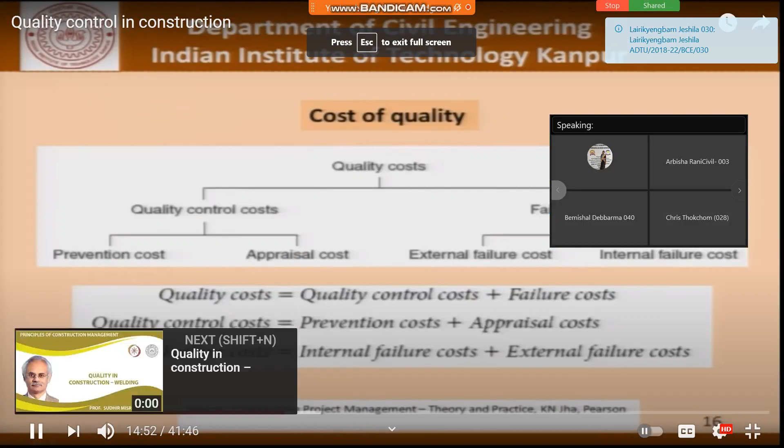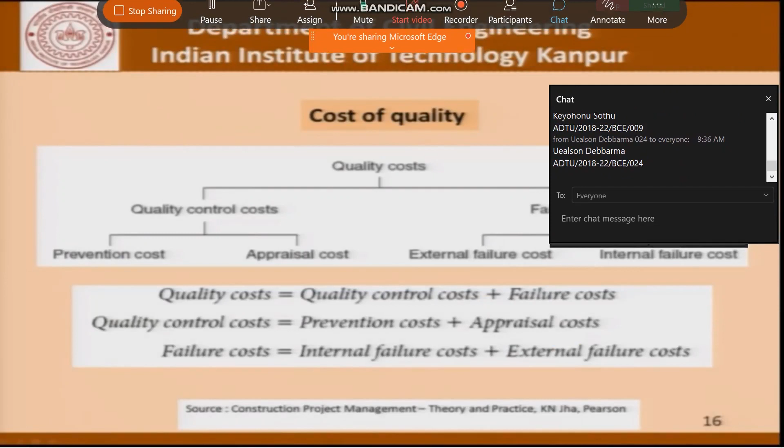Those failures could have an external cost and an internal cost. So the quality cost is equal to the cost of quality control plus the failure costs. The quality control cost is prevention cost plus appraisal cost, and the failure cost itself is internal failure and external failure costs.

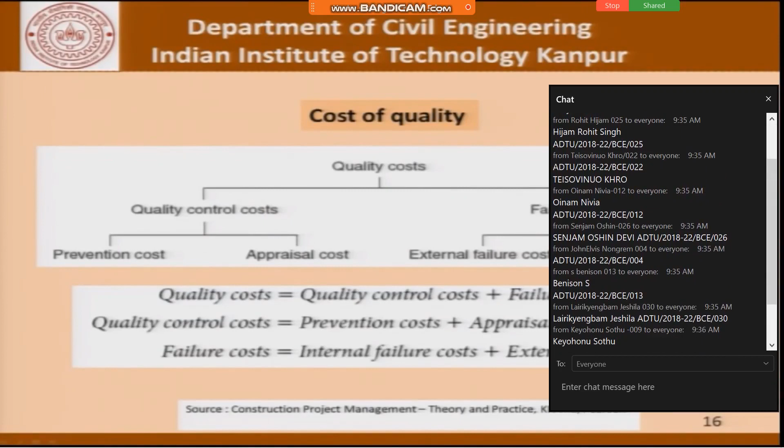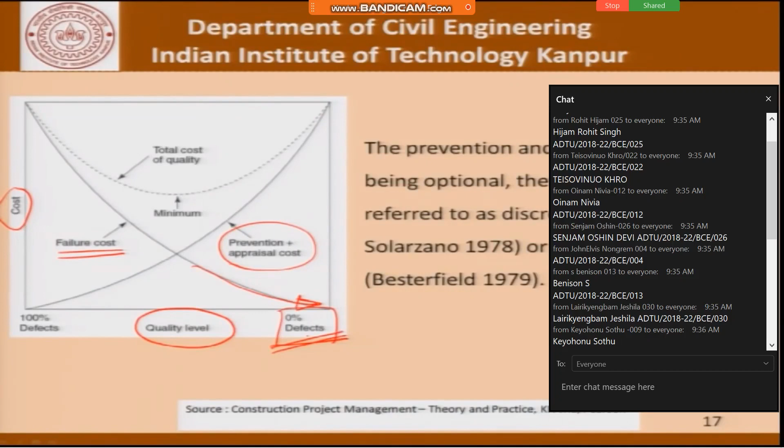Now it is up to us to decide what is the level of quality that we will keep, what is the level of quality that is acceptable to us, because there is a cost involved.

Now in the discussion so far, we've already talked about construction safety. Do you see some parallels between construction safety and construction quality? At least I see several things which are quite in common. When we talked of safety, we talked of prevention of accidents and the cost of safety.

Direct cost, indirect cost - accidents having a direct cost and an indirect cost. Then there was also the whole department of safety - a safety engineer, a safety audit team and so on. Those people were also involved in ensuring that the project site is a safe place to work, that is, there are few accidents. In fact, the target is zero accidents.

Now, in order to ensure that, there is a cost involved, and much like in the case of quality control, there will be quality inspectors, quality audits, quality reports, a feedback mechanism, and records have to be kept.

Both quality and safety inspectors are not mainline execution people. They can be looked upon as people who hinder the progress. So a quality control inspector can well say that the product being made or the construction activity being carried out does not meet quality standards, does not meet acceptable standards, and therefore must be stopped.

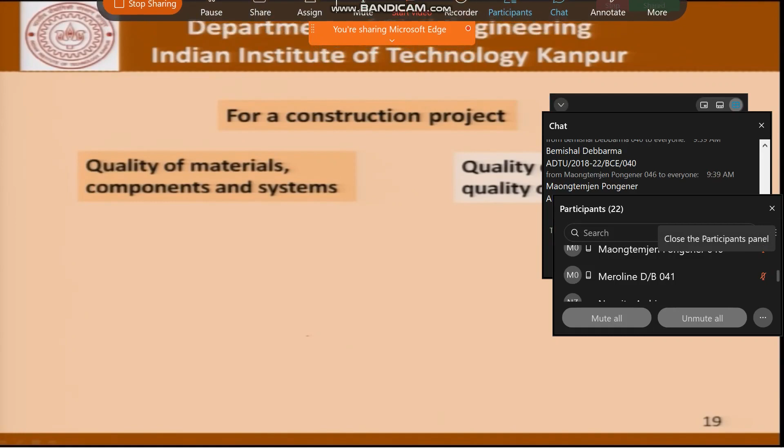Now as far as the first view is concerned, where we are talking about materials, components and systems - what are the materials that we use at site? It could be cement, steel, concrete, pre-stressing tendons, and the list goes on and on. Each of these materials must conform to certain quality standards, and that is what we are talking about when we say quality control of materials contributing to a construction project.

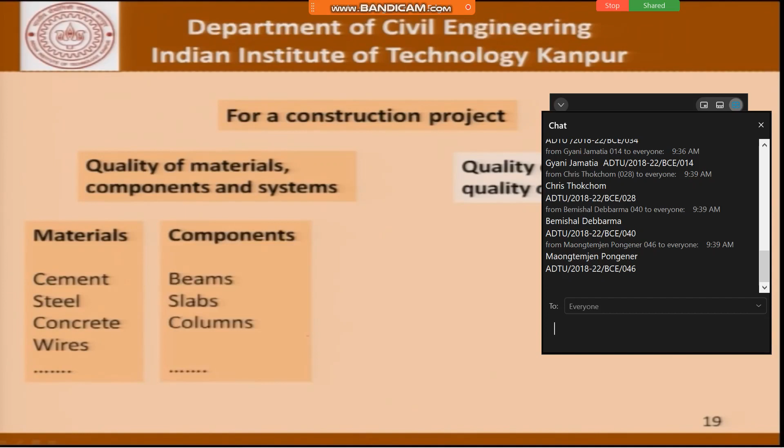Moving on, there are components of a structure. It could be beams, slabs, columns, walls.

All of them as components are made of materials, but there is also a lot of other things that goes into making them - the formwork, the compaction of concrete, the welding if it is involved, and so on.

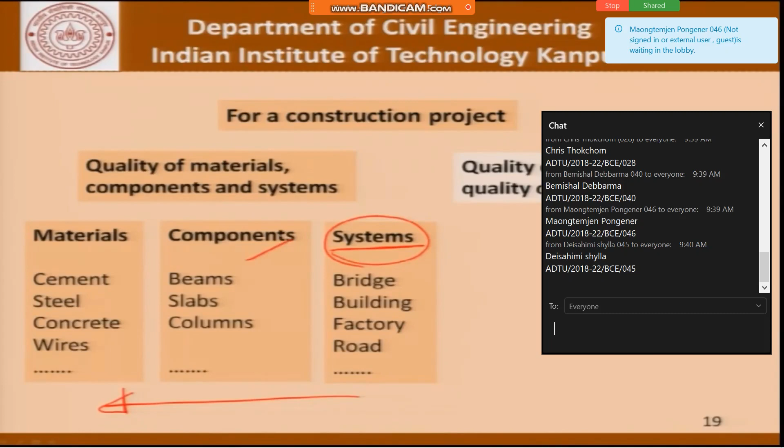Then there is the system. Finally, it is the system that is the target - the bridge, a building, a factory, a road, a sewer line, and so on. The system is the final product. In order to ensure that the system performs acceptably, it's important that the components perform satisfactorily, and it's important that the materials perform satisfactorily. So there have to be benchmarks for materials, components, and systems, and that is what is ensured when we talk of quality control and quality assurance in construction projects.

Now, coming to products versus processes as far as construction industry is concerned, products could be sleepers, pipes, girders, and so on, which are largely factory-made products. So in this day and age, we are talking about prefabricated members. Now, no matter how much prefabrication we do, we will be able to make certain products, but finally they'll have to be integrated at site to develop a system.

We've often seen construction being done with precast girders. Now, those precast girders are factory-made products, but they have to be assembled, they have to be erected at site, and there's a lot of workmanship that goes on while they are at site in order to ensure that the bridge made with them meets the requirements.

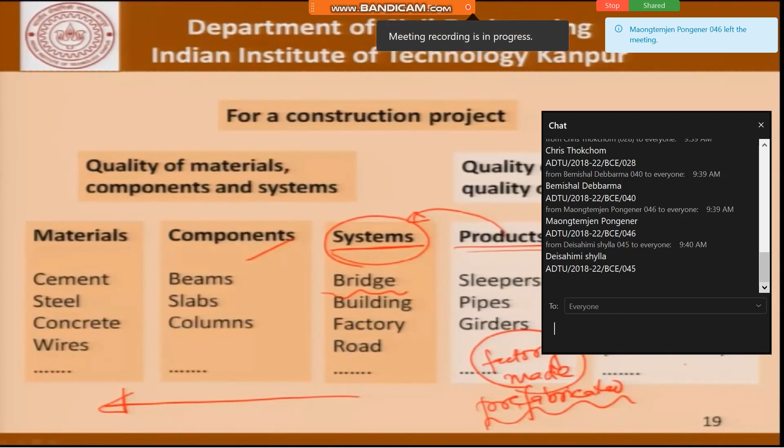Coming to processes, there are so many processes. There could be welding, compaction, transportation of concrete, and so on. The list is endless. Each of these processes has to meet certain requirements. Only then will the products meet the requirements, only then the components will meet the requirements, and so on.

So the whole gamut of thought process as far as construction industry is concerned from the point of view of quality is a very complex situation, and it's important that we understand each and every detail of whatever small bit we are looking at, and that will be the approach that we will adopt as far as this discussion is concerned in this course.

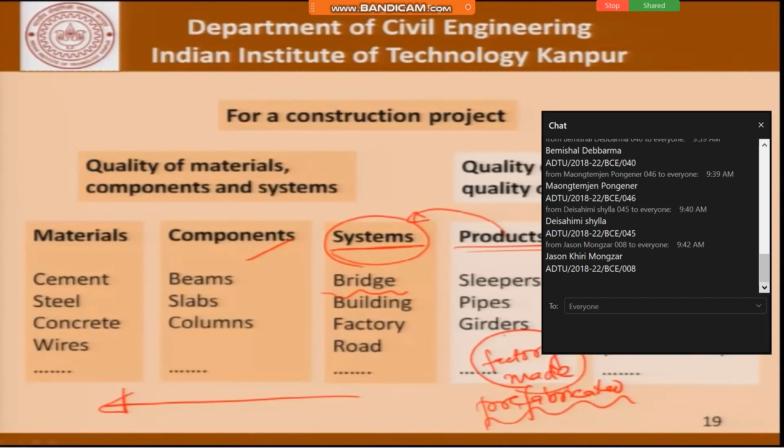Now, the thought process of quality control is closely linked to standardized methods and specifications. Test methods lay down a detailed procedure for almost all the steps involved in a test, especially for steps that are considered important from the point of view of results.

We'll see this when we briefly talk about the parameters which are important from the point of view of testing the strength of concrete today, and later on in a subsequent discussion in greater detail.

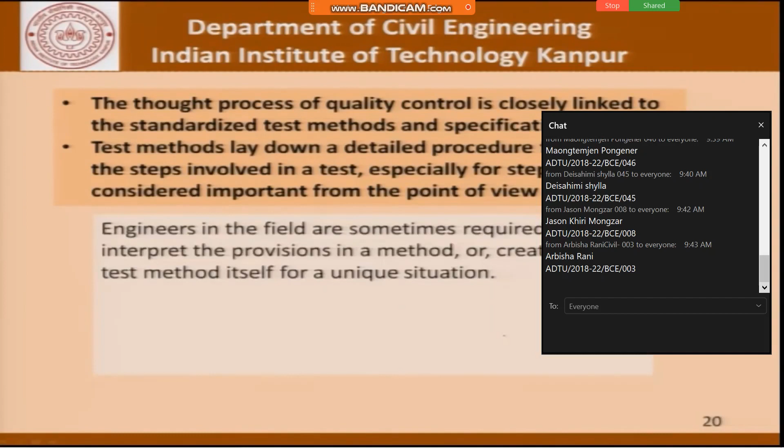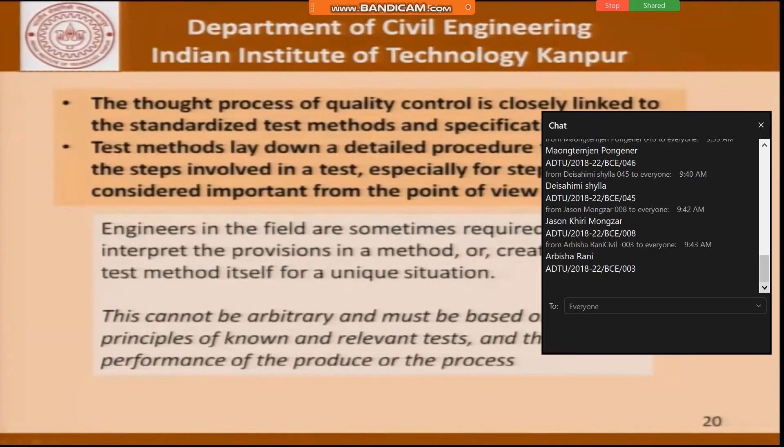Engineers in the field are sometimes required to interpret the provisions in a method or create a new test method itself for a unique situation, and this adaptation or modification that an engineer makes cannot be arbitrary and must be based on principles of known and relevant tests and the required performance of the product or the process.

We'll appreciate the import of these statements better when we look at some of the examples. And now the purpose of these tests could be to ascertain the performance of a product or a process and determine its acceptability, or it could be simply to compare two products or processes.

Issues relating to quality control will be examined using case studies or taking up examples of simple processes from the field. And the effort will be to carry out exercises that help in understanding the issues involved and how they are addressed in a quality assurance, quality control framework.

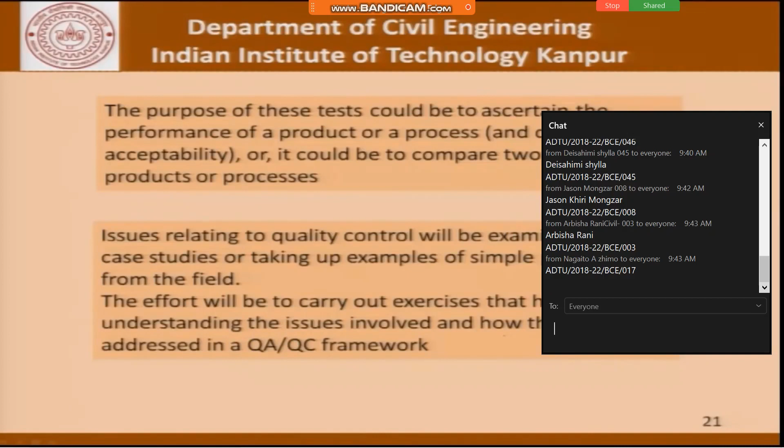So the discussion in this course is not so much about the provisions that exist, but what considerations must prevail or may have prevailed when we introduced those provisions in a particular test method or a specification.

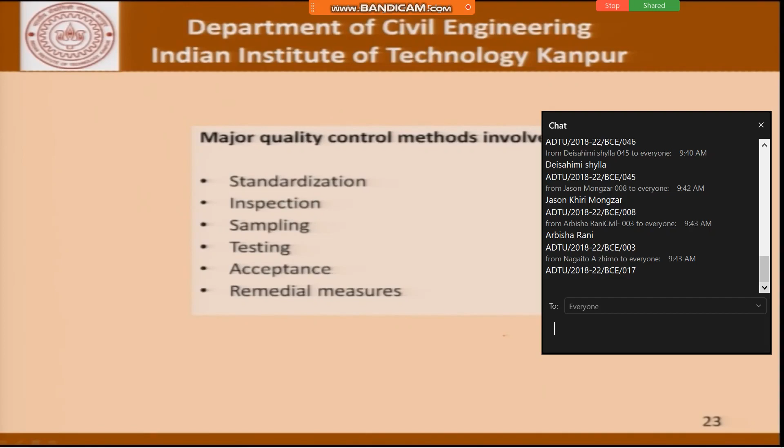Now, to recapitulate, major quality control methods involve standardization, inspection, sampling, testing, acceptance, and remedial measures in the event that acceptance criteria is not readily met. These are things which should be addressed in our procedures, and only then we'll be able to talk about a proper quality control, quality assurance program, and also have fewer disputes, and that's something which we'll talk about later. We'll take up and discuss some specific issues from the construction industry and look at it.